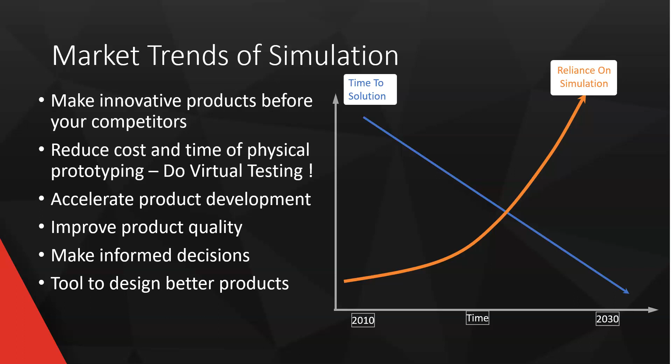So quickly, I want to talk about where SolidWorks simulation and plastics fits in. We have a lot of simulation tools here in the SolidWorks package. Let me just get my pointer out so I can show you what I'm talking about.

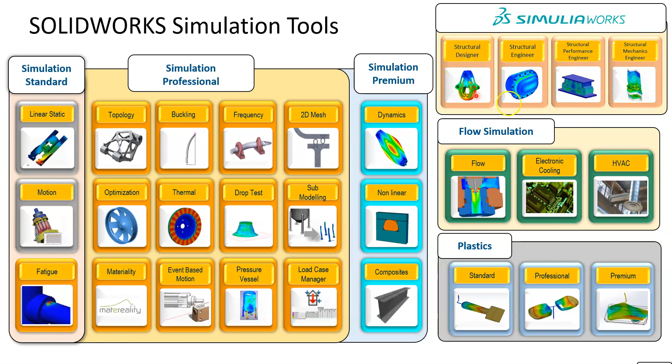Also, here's Simulia — we're going to talk a bit about this, but the plastics version. I've talked about Simulia in a previous webinar, so if you want to just check that out. So that was simulation — we've talked about simulation, what it can do for you.

But now I want to talk about plastics. So let's talk a bit about plastics. So what is the difference between SolidWorks Plastics and 3DEXPERIENCE Plastics?

Like I mentioned before, there aren't that many differences. They can actually fill the same roles. For your business, they can give you the same things, but they have slight differences. For example, 3DEXPERIENCE is more scalable. You can buy a license for a short amount of time for just one project and then use that again. SolidWorks has a couple more specific features, but 3DEXPERIENCE has its own fair share of them. So mostly when I'm showing pictures and talking about stuff in this webinar, really they are very similar. It just depends on your pricing model, your interest, and your pre-existing knowledge, which we talked about in the last slide there.

Another thing is the meshing capabilities within 3DEXPERIENCE are industry leading. They are insane. They mesh your parts very quickly and automatically. You can change your mesh if you choose to, but most of the time it does it for you. You don't even think about it.

Then you have local and cloud solvers. SolidWorks is a local solver. You can't solve your stuff on the cloud, but you can solve it on an external simulation computer or server if you needed to. But you can also do that with 3DEXPERIENCE, and with 3DEXPERIENCE you can solve on the cloud. So you can literally just make your simulation, set it up, offload it to the cloud, and then come back to it when you're done. It's amazing, and you can keep working - you spare all your hardware for that time that you're actually simulating.

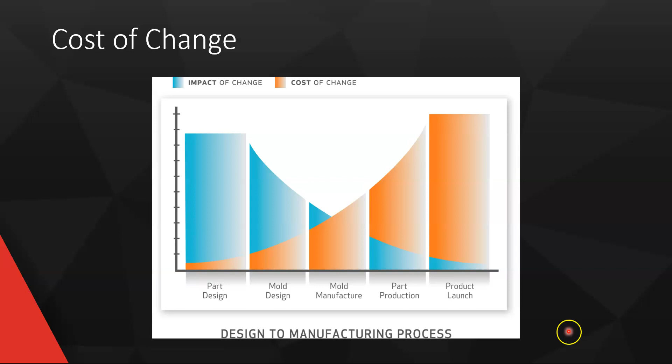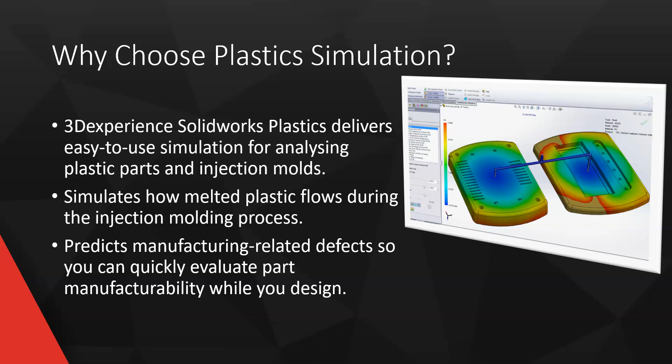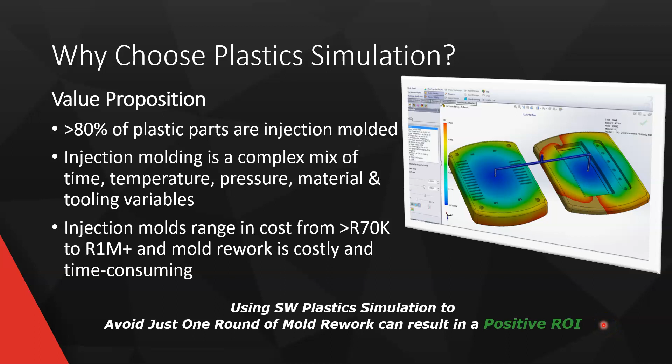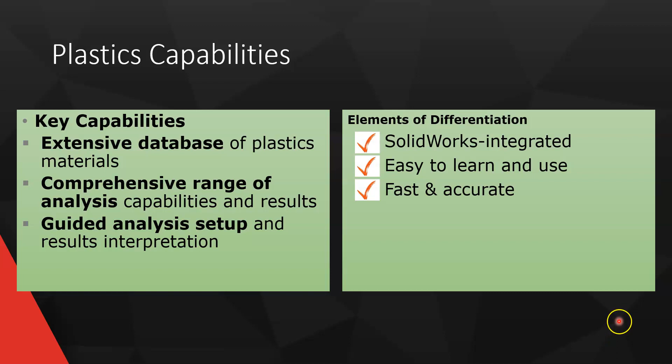So the elements differentiating SolidWorks and 3DEXPERIENCE and the rest - keep in mind, they both integrate very nicely with SolidWorks. If you have SolidWorks already, you can just draw, the parts actually integrate very well, it's within the SolidWorks environment. And this is both 3DEXPERIENCE and SolidWorks - it's easy to learn and easy to use, and it's very fast and accurate.

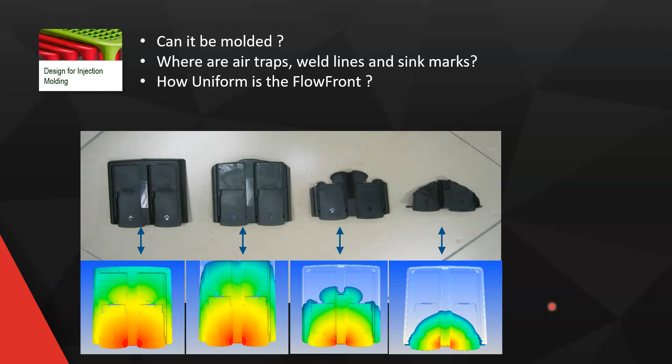So if you see this picture, you can see this is a short shot - the thing hasn't actually generated fully. This is simulated first, and then it matches with the real world counterpart. So you get these four different investigations into the flow front of the plastic. You can tell the tool where I want to inject, and then you can see how long it takes, you can see the pressures, you can see everything as it goes.

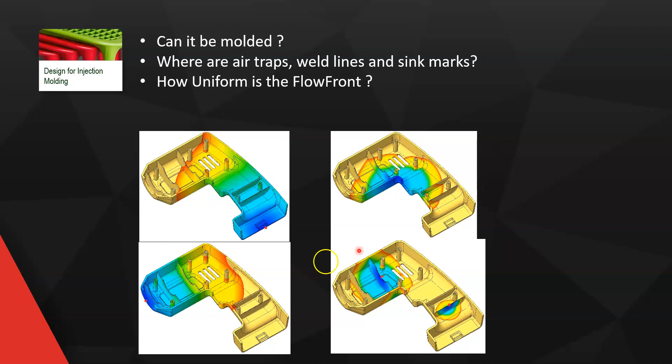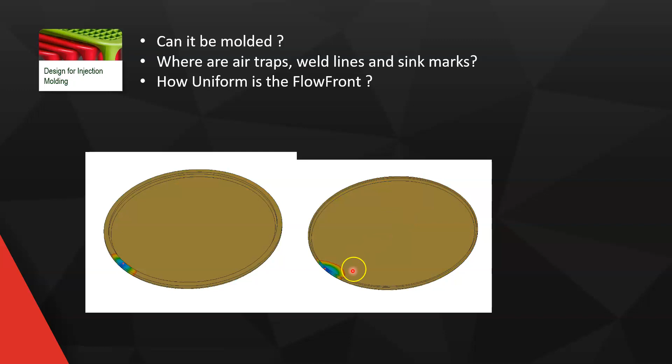You can see multiple injection locations, like down here. And you can see if I look at these two versus this one, this is a much more uniform flow front compared to these - so realistically, you can have less problems with this top right one than with these others. You can also see the flow front, caused by pressure and viscosity, and how the flow front changes as it goes. Obviously, this is more desirable than this because this will create an air trap, and we'll see now.

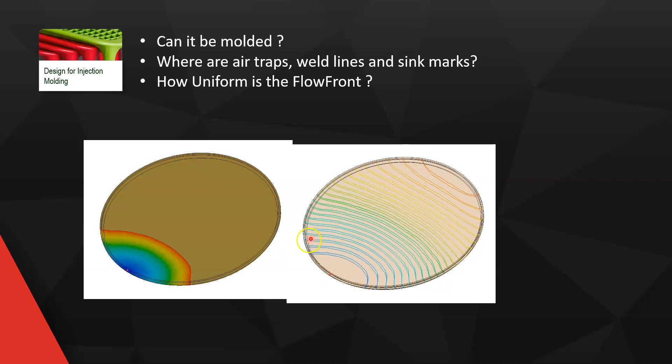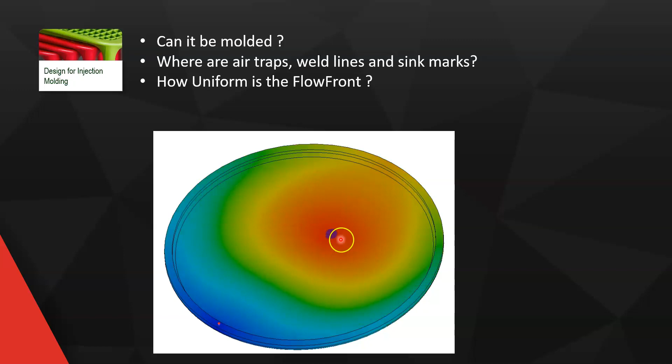But here you can also have these cool little plots that show you exactly the time as the plastic flows - you can see exactly these little contours. And then here, look, this is that one I showed you earlier - you can see the plastic goes around and forms a little thing over here. This is an air trap. So the air would get trapped in here and it would cause big problems unless you have to create an air trap there, so you can tell the software where to make air traps.

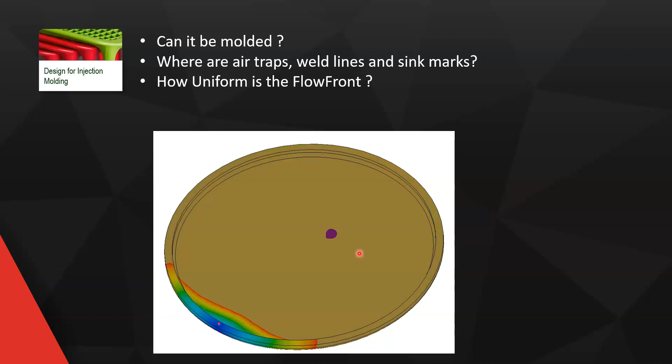So here you can see a bunch of air traps. This tells you that you need to have air vents or else it won't work for you. So even little things like that matter. We've talked about big stuff like reworking a mold, but in reality, just being able to design your product quickly, knowing where the air trap's going to be, saves you money and time straight away.

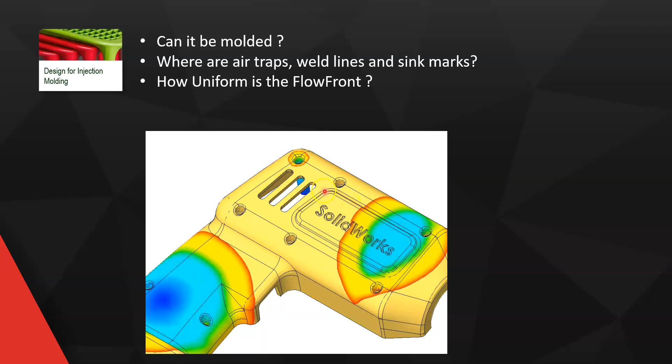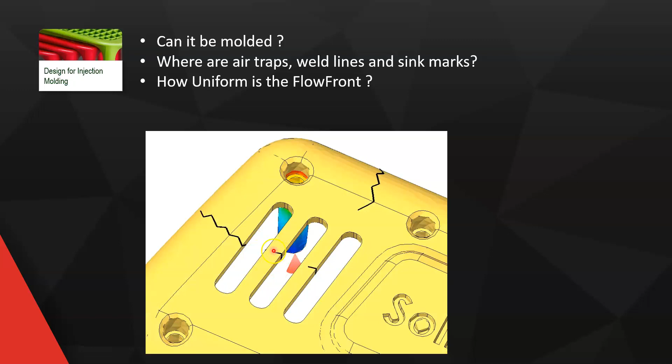Also, it can predict weld lines. So where the plastic meets, you get these little weld lines where the front of one flow of plastic meets another front of plastic, and that can be a high stress concentration area. So you want to make sure this isn't happening on a point that's going to take stress. It's very nice that you can do that.

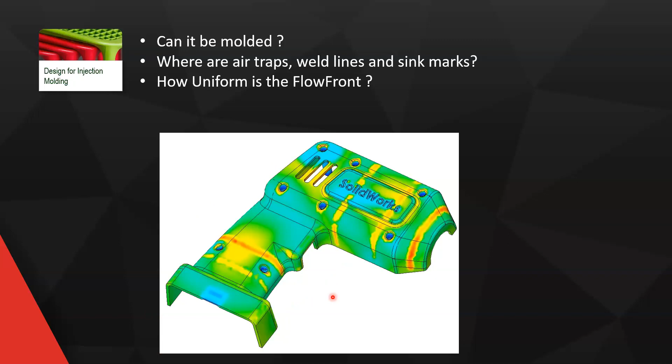And then sink marks. This is just from the cooling of the plastic and the filling of the plastic. You get these marks, and it can actually predict that too.

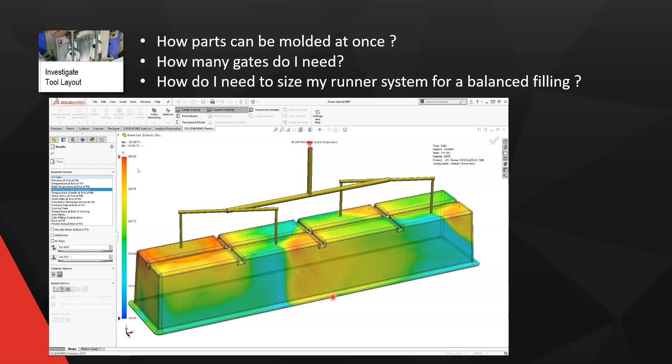So more questions: How many parts can be molded at once? How many gates do I need? And how do I need to size my runner system for balanced filling? For the first one, how many parts can be molded at once, that's up to you, that's the strength of your computer. Honestly, you can mold as many as you want. You can see we're molding a whole bunch of different gate locations as well, and you can see how many gates you need. That's the answer this can give you.

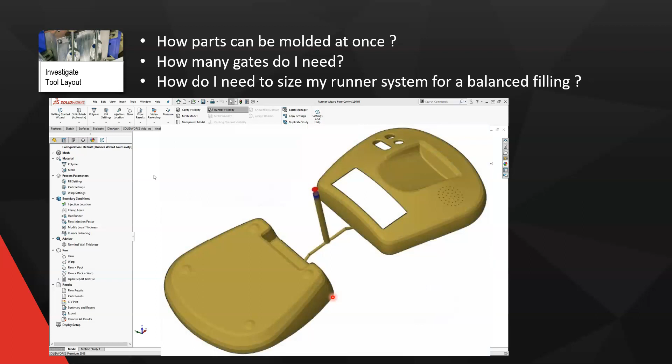So if you look at this picture, you can see the left side fills quicker than the right, and you get this uneven fill. So what SolidWorks can do is automatically resize your runner system to fill the whole volume at the same time. It fills it, and then shows you it fills exactly the same time. It tells you how big your runner system must be on each side to get that.

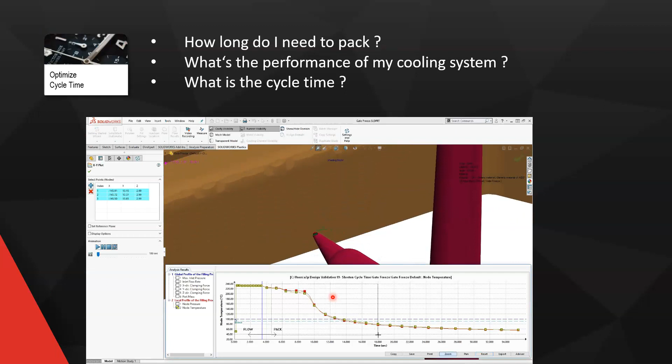It's really powerful. So more questions: How long do I need to pack? What's the performance of my cooling system? What is the cycle time? All of these questions can be answered with 3DEXPERIENCE or with SolidWorks. In this case, this is the SolidWorks user interface.

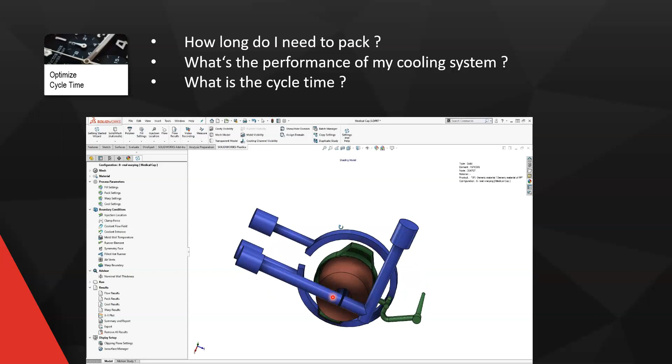Very, very nice. You can see how easy it is to distinguish different colors. You see these little blue things, these are actually coolant lines, not in this one, the previous one. And you can essentially simulate the cooling of the system, so you can see if your part will actually cool properly.

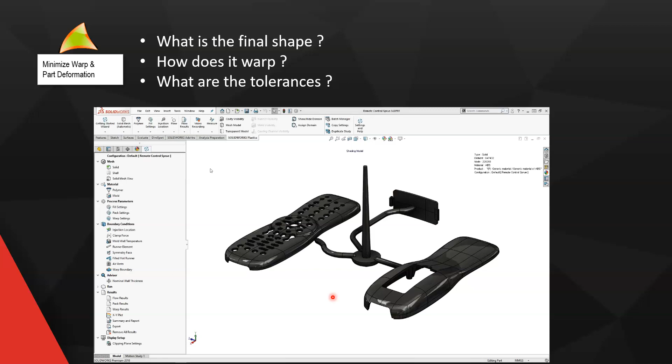Then these are cooling lines, and we are going to see how the part warps as it cools after it's been ejected. That's the crazy thing. So you get, what is the final shape? How does the shape warp? What are the tolerances? All of these answers can be given to you by SolidWorks or 3DEXPERIENCE.

It's really, really cool. So a little bit more about SolidWorks, this is within SolidWorks Premium. You get different types of meshing: the tetrahedral mesh on the left, and you can even do hybrid meshing, where you have tetrahedral mesh on the interior and more square triangular prism meshes on the outside. It's really cool stuff, two different mesh types for different situations. And if you have the expertise, you can do kind of whatever you want.

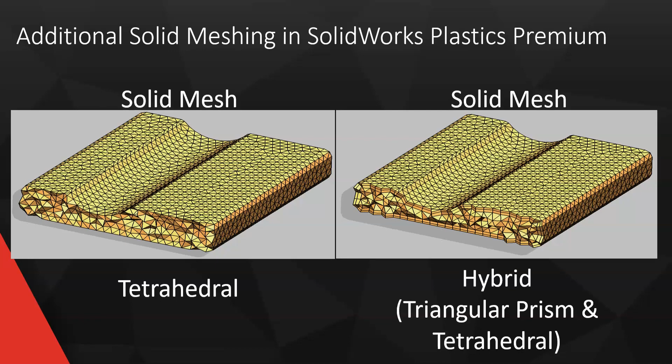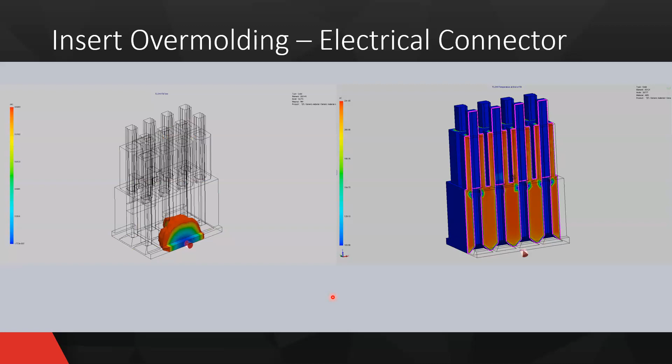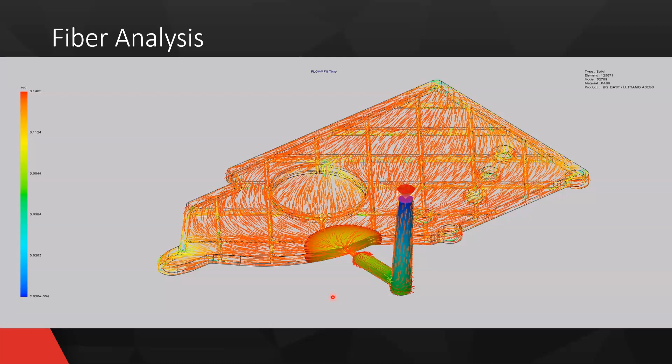Fiber analysis, this is also within SolidWorks. It can tell you how, as the plastic flows through the part, the fibers are going to look within it. So if you have a stress concentration issue, you can very easily alleviate that by knowing the way the fibers go. So as a designer, it just gives you tools to do anything. You can choose whatever you want, and you can fix and solve whatever problems you choose.

Then we have birefringence. This is really crazy.

SolidWorks can actually tell you the refractive qualities of plastic that you have injected. Due to different temperatures and pressures, a piece of plastic will have different refraction qualities. You get these little rainbow things, like if you look through glass a certain way, or different plastics.

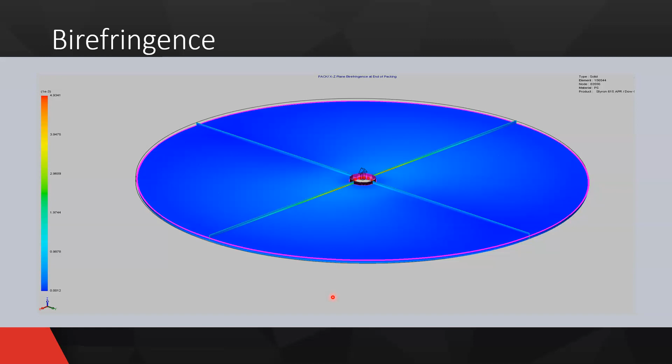This thing can tell you how it's going to react. It will tell you exactly how it's going to look from different perspectives, and you can fix that. So if you're 3D printing something, or injecting like a lens, you can literally just solve that problem with this capability.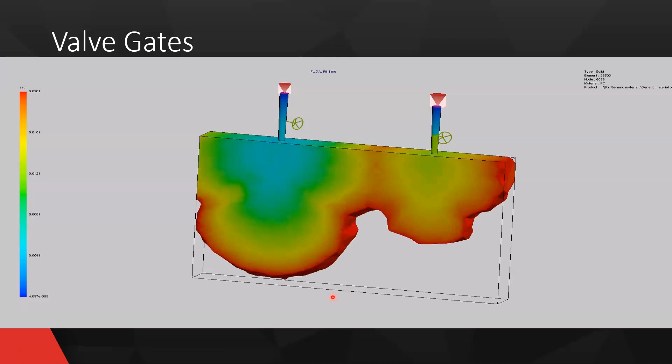Then you get gas-assisted injection. Often you need to hollow out the interior of a plastic part, so you inject a gas through the center, and you can actually simulate that. You can also simulate separate valve gates, timing them to inject at certain times, so you can experiment with what's most optimal for fill time, pressures, and ease of fill. That was a bit about SolidWorks Plastics.

A lot of the capabilities are in 3DEXPERIENCE, but maybe not all the high-level ones. I'm not sure exactly, because there are a million qualities, but many are similar. So let's talk about 3DEXPERIENCE Plastics for a second. This is the plastic injection engineer role.

With the role comes a whole bunch of different features. You have bookmarking, which is file management. You have collaborative lifecycle, which is a PLM system. You have credits and tokens for cloud solving. You have Simulation Finder, which can help you find a simulation within your system. You can define new materials, find products, monitor your cloud jobs—like a million different things.

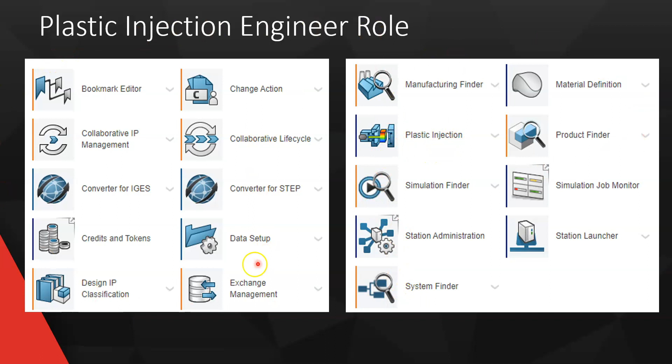Change action is another part of the PLM system. You can even convert for step files and IGES files. And then here's this plastic injection right here—this is the thing, this is what we use, this is the actual role. So this is the role, and each of these are apps within it. It's a little bit of a different system, but let's talk about it.

You can virtually test the performance of plastic parts and mold tooling designs with an intuitive guided simulation assistant that minimizes the learning curve. You can cover the needs for all industries, all key workflows, and all user personas with a single role, as well as predict common molding defects, including weld lines, sink marks, air traps, and incomplete filling.

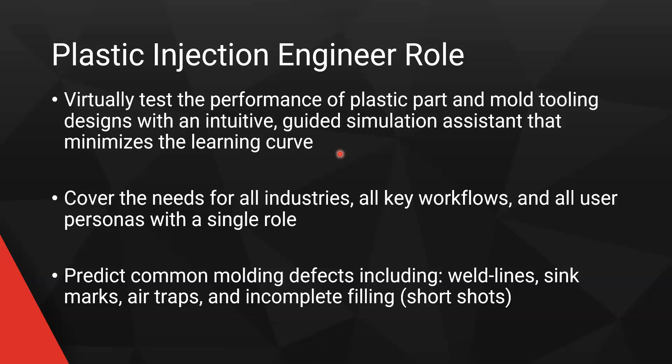So you can do all this stuff in SolidWorks, but 3DEXPERIENCE does it too. You can evaluate the effectiveness of these, which we've kind of talked about already, but you can also apply advanced structural capabilities available in the 3DEXPERIENCE platform, such as nonlinear, multi-scale material modeling directly on a common model. It's really powerful, because you can have a SolidWorks part or a 3DEXPERIENCE part, and actually run it on this plastics role.

You can also leverage process automation, design of experiments, and advanced optimization tools available in the 3DEXPERIENCE platform. This is really important, because 3DEXPERIENCE is like its whole own world, and it connects all these different industries. So if you have a plastics role, it's super integrated with all these other roles within 3DEXPERIENCE. You can kind of do whatever you choose to—combine it with all the PLM systems, task management, and all the other design tools. Really cool stuff.

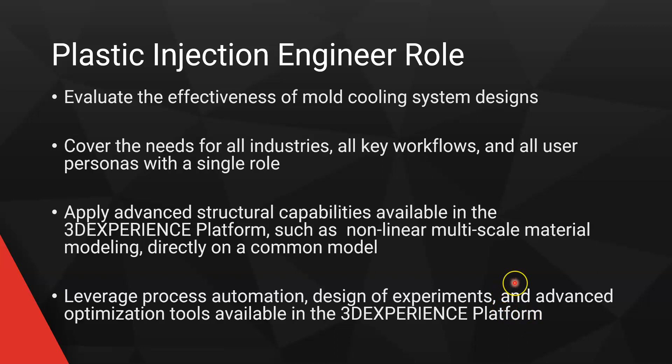So let's look at a little video about plastic injection.

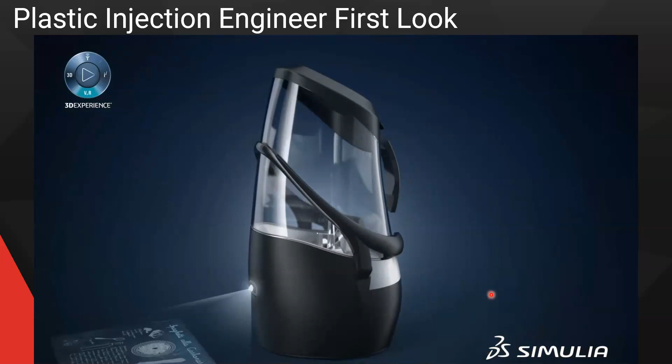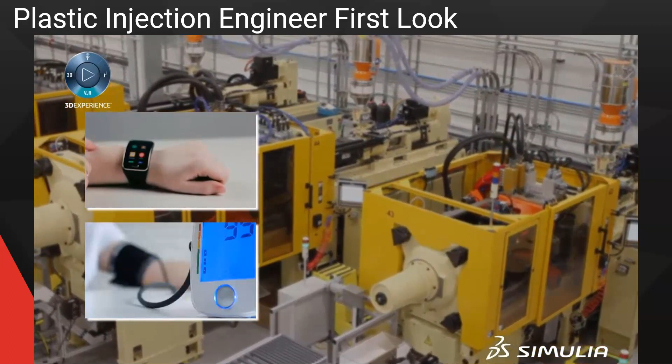From personal electronics to home appliances, office furniture, and even medical devices, plastic products are everywhere. Optimizing the design and manufacture of these products can have a huge impact on their overall performance, quality, weight, cost, and time to market. The plastic injection engineer role on the 3DEXPERIENCE platform is an essential tool to validate and optimize injection molded plastic part and mold designs. Starting from SolidWorks, you can connect to the 3DEXPERIENCE platform using an integrated workflow that enables you to easily save, manage, and share your design in a secure, cloud-based environment.

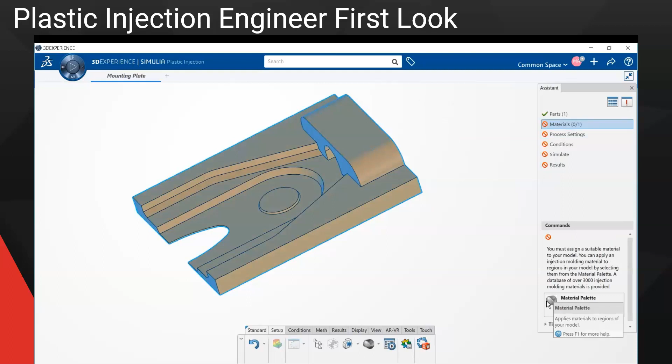With the plastic injection engineer role, you can use a guided workflow to quickly set up and simulate the filling injection molding process. Product designers can assess the manufacturability and quality aspects, such as weld lines and air traps.

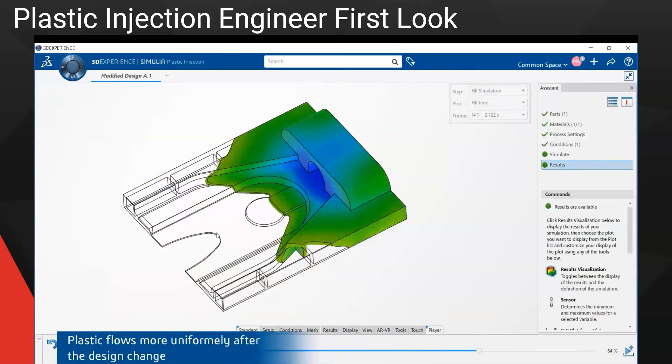When issues are identified, you can make a design change in SolidWorks and quickly return to the 3DEXPERIENCE platform to rerun the simulation and evaluate the results.

Furthermore, mold designers can evaluate and optimize the feed system and cooling circuit designs. You can also simulate advanced molding processes like two-shot overmolding.

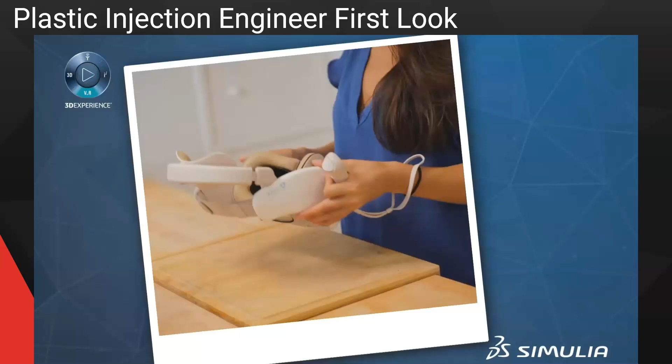With Simulia's Plastic Injection Engineer role, you can take control of your plastic part and mold designs to eliminate mold rework, improve part quality, and decrease time to market.

Cool, yeah, so really interesting. It shows you how you can integrate SolidWorks and 3DEXPERIENCE. And yeah, it's very, very, very cool stuff.

So that was 3DEXPERIENCE Plastics. Let's move on to the plastics demo. I've done a demo and I want to show it to you guys. It was all within 3DEXPERIENCE, and yeah, it's really, really cool.

So basically, this is 3DEXPERIENCE. This is how it looks, this is the user interface, and this is exactly what you can do. So that's Mecad Sales, that's what I'm using, but that's a different platform - each one can be its own. I've created this whole dashboard.

All of this was done by us or by MeCAD, and this is something you can edit yourself. It's almost like a website that you can change on the fly all the time, and everyone can see the same thing. So these are all the apps that I have with my role, and yeah, they're very, very, very powerful and useful.

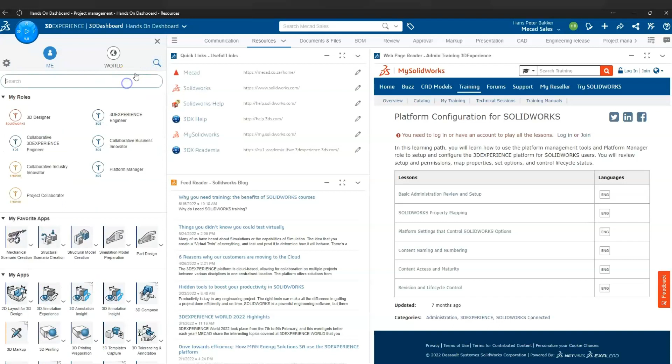So let's look at them a little bit more. This is design with SolidWorks, which is what we're going to use. This literally lets you integrate SolidWorks with 3DEXPERIENCE, so any part or any capability within 3DEXPERIENCE can be integrated.

So that's the plastic injection app, which we talked about already. Let's look a bit more at it. So we close that, and now we can close this window and look at everything.

So what I do is I can go to the search bar and just search. Also remember, this is all in a website - you can access this from anywhere as long as you have the credentials.

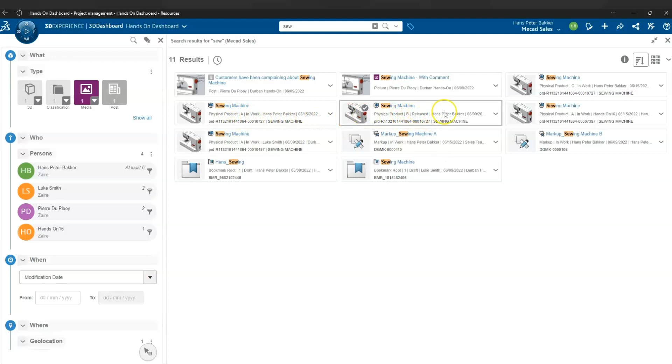So I search 'sew', and you can see there's different sewing machines. There's the A revision, a B revision, and a C revision. I've made different revisions to make changes in the part as I've been playing with it and experimenting.

So I go 'open with', and you have all these different things you can open it with, which all have different powers and capabilities. Let's go to design with SolidWorks - press it.

It's quite a big part, so it might take a second. But basically what it does is it takes a part in 3DEXPERIENCE and it literally opens it into SolidWorks - it just pops it up in SolidWorks.

Okay, so we're opening a very big part because it's got a whole bunch of moving parts and mates, which I'll show you. So this takes a while, but it would anyways, depending on who you are and what your kind of computer is.

So if we look on the right-hand side, this is the window that is the 3DEXPERIENCE add-in into SolidWorks. It's really, really cool - it essentially lets you get the power of 3DEXPERIENCE directly from your SolidWorks. You can do product lifecycle management.

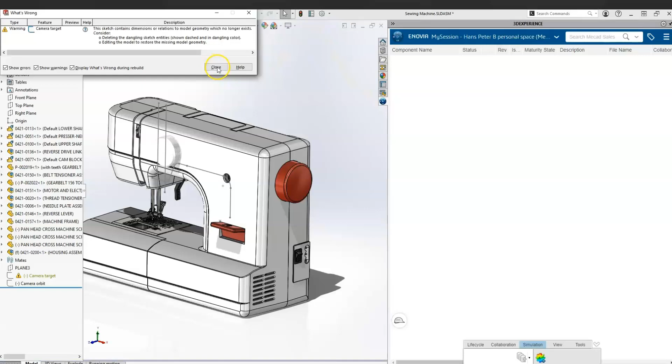This is a little error about camera targeting, just from messing with the part. And you can see there's a lot of information here on the right. Don't get overwhelmed, don't worry - it is actually quite straightforward once you get a hang of it.

So this is the part we opened, and you can see if I take that little wheel and spin it, the actual little thing moves up and down. So the whole thing is literally a working sewing machine with all the parts mated correctly, which is crazy. Just by the way that we can do this, it makes me very happy to actually be a part of it.

So what I want to do is show you how you can integrate SolidWorks and 3DEXPERIENCE. If you press a part in the SolidWorks environment, it highlights a feature in this feature tree on the right. Vice versa, if I press one there, you can see a little highlight box there. So it's almost like you have your own feature tree - you almost don't even need the one on the left. You can use this feature tree for pretty much everything you need.

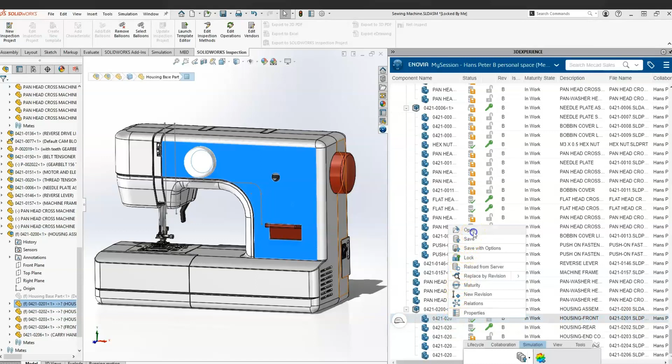As well, this thing is integrated with the cloud as it goes, as well as a PLM system. It's crazy. So if I press this face, which is what I want to use, I right click it and say open - this is all real time, by the way.

Boop, straight away it opens into SolidWorks for me. So now I have this part in SolidWorks, and I'm going to do a simulation on it. My plan is I want to see if I can fill this part and see how it works. I could do it in SolidWorks Plastics, but I'm going to do it in 3DEXPERIENCE. And it's this easy.

So this is the window we have, and it shows all this information - revision, maturity state, description, file name, the collaborative space it's saved in, all cool. So I have to lock it, which is essentially like in PDM where you check out a part. Now I can edit it and change it and do whatever I want. It's my part as long as I have locked it.

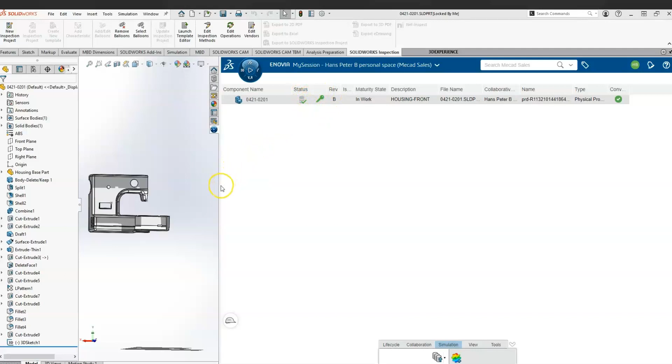So I've done that. You can see you can drag this window - it's completely editable, it's up to you. So I'll make it smaller so I have some more space. And I can literally go to 3DEXPERIENCE straight from here.

So I search plastic injection and I press it. What this does is it launches plastic injection and takes my part and puts it into the plastic injection environment as a simulation part. I can just run a simulation on it straight away. It really is that simple.

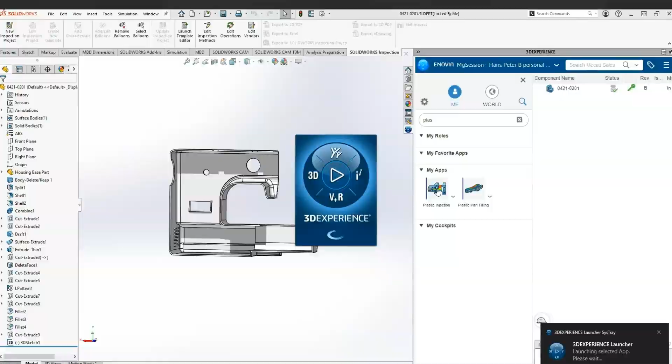So it obviously opens up a launcher, and then I open another screen to just drag it across, and yeah, so that's what we get. So we have the part now in the 3DEXPERIENCE environment. On the right, we have the assistant, which has parts, materials, all these things.

Don't think too much, it's not too complicated. It literally just helps you set out your simulation, because you go top to bottom - boom, boom, parts, materials, process settings - and it literally helps you. So you see if I press parts, it shows me, okay, that's what you need - you need a contributing part.

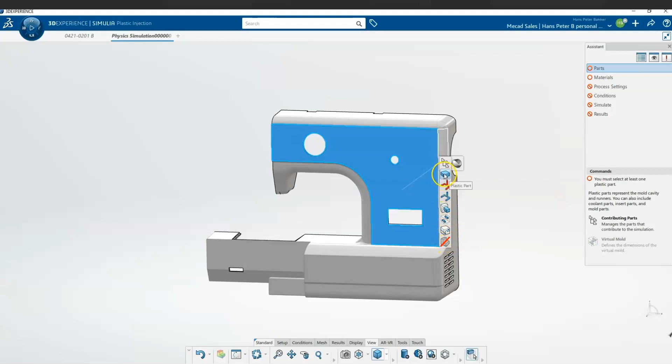So I have to decide which parts I want to contribute to the simulation. I say I want the whole thing. And then I need to tell it what that part is. So I go there and press this little icon, and I can decide what this part is to me. You can have multiple parts and bring them in, and you can even insert parts now. You could bring in a piping system, make it a cooling system or a hot runner system - that's up to you.

So now what it's done is it's decided this is now a plastic. You can literally go straight there, press materials, and then you can create materials. You could also have gone in the assistant and pressed materials. And I want you to look at that - 4,210 plastic materials inside this environment.

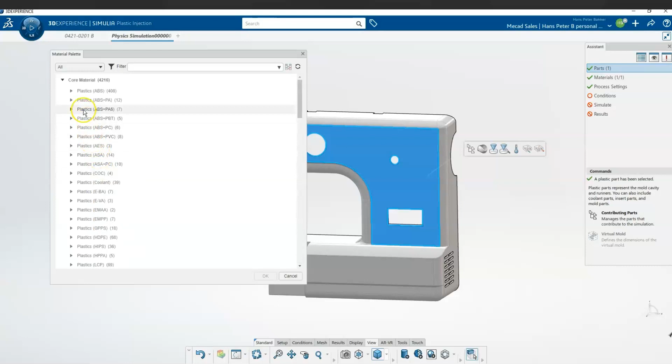This is just plastics, by the way - this isn't any other parts, no metals, just plastics. So over 4,000 plastics within this environment. That is a massive database. And you can see, if I go to ABS, there's 408 different ABSs. So it's very, very likely that the plastic you need is here, or at least a very similar one.

Also, this thing is a cloud-based platform, so it constantly adds more. You don't have to do anything - it just automatically brings them in, like you'll go in, run an update, and it will be there.

So if we go to process settings, this is all the settings for the simulation. You get shared settings, plastic flow simulations, pack simulation, mold, melt, heat transfer, mold thermal simulations, and summaries.

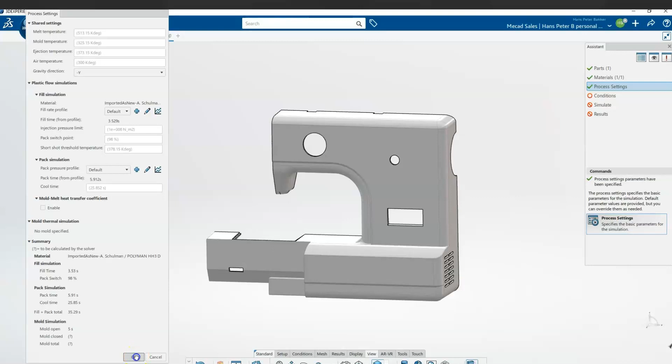So you basically get all these different parts of a simulation. Really, really cool. I made it a bit big for the screen, so I'm just going to drag it up and exit it there. You can see how many settings you have. You have total control of your simulation, you can do kind of whatever you choose, and this is all really how simple it is.

You go to conditions, you can press auto injection. Then you can choose a part, you can choose the diameter of the actual injection location, and you can see how many locations you want. And you can also exclude faces and stuff like that.

So let's say we want one face, one location. We say find locations, it calculates it, and it pops up over there. So it says that is the ideal location if you want to just do this size and you want to inject that way. So this is essentially how you set out where you actually want to.

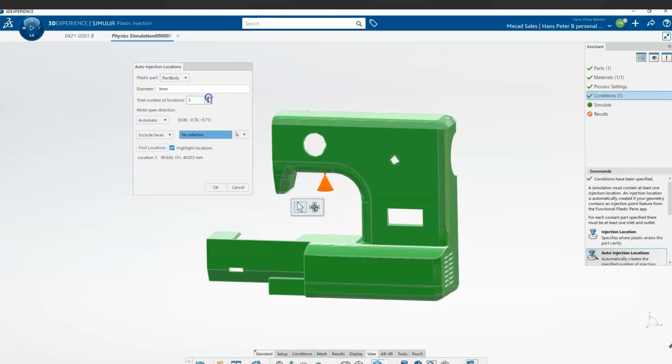But you could also, you see there on the right, injection location - so what I've done now is I've said 3, and now it selects 3 different points, and it shows me how they would actually fill. So the green one versus the yellow, that's kind of a guess of how it will fill.

So let's go back to 1, and then you press OK. And then, because I still have to go back and actually change it, because it is now 1, but now I have to go back and reselect just for the view. So it's going to ignore the ones that we used already. We say okay, we just select 1, we say find location.

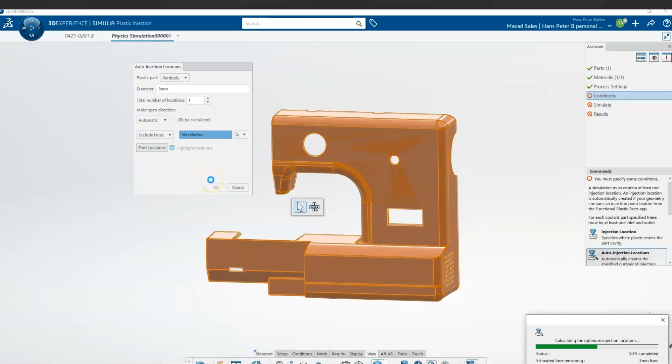So it just wasn't highlighted before. So now it's going to highlight them. We highlight the one location, say okay, there we go. Whole part is now, we have 1.

So if we go to simulate, we press simulate. Now there are different ways of solving - you get the cloud solver and you get a local solver. This is what really is so cool about 3DEXPERIENCE, is you get these different options.

You can simulate on your local PC. If it's overnight, you don't need it, it's fine. Maybe you understand it a bit more - this is also fill, pack and cool, warp simulations. You can do all these different things.

So we're just going to choose a local solve because I haven't set out the tokens yet, but that's okay, we don't have to. So I can choose how many cores I want to actually use as well. I could tell the computer, like, only use 4, it's fine, you don't need to use that many. I say okay, and then it's going to run.

And basically, this took about 5-6 minutes. I'm not sure how long, but I'm going to skip ahead because I don't think you need to sit here and watch the whole thing. But this is all still live - this is exactly what happened.

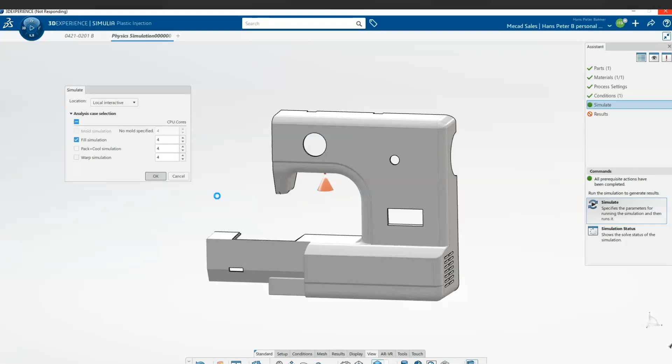So you can see it's busy loading, it's busy thinking, and then a little simulation window is going to pop up. This is also the automatic meshing that I was talking about, so this is the mesh it came up with. We can change this if we want, we can easily change it, but I chose not to - I'm just going to leave it like it is.

It's quite dense, as you can see, so that's probably why the simulation took so long. But it's dense as well, which is not necessarily a bad thing, because we have a lot of small little parts. This is actually a big part to plastic injection mold, and it's a big part to simulate.

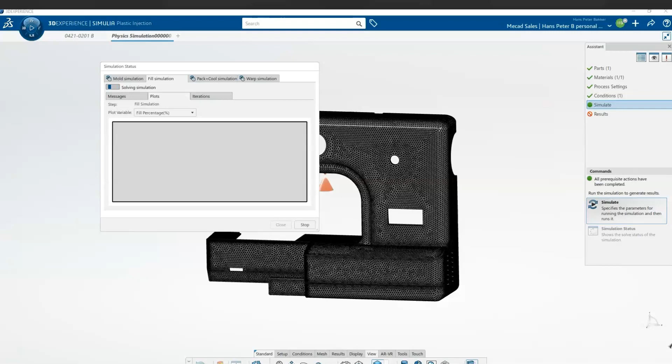So pretty cool stuff. If you look on the window over here, it's busy solving the simulation. It's still initializing it. Once we actually get there, so now it's said, okay, cool, everything is set. Let's start the maths - this is the flow rate into the injection location.

And then we can also go and we can look at different plots as it solves. It's quite intuitive - like you go to flow rate, it shows you the flow rate as the thing goes on. You go to maximum injection pressure, it shows you it's still increasing, which is what we'd expect. Minimum temperature, max temperature - these are just temperatures of the plastics within the product.

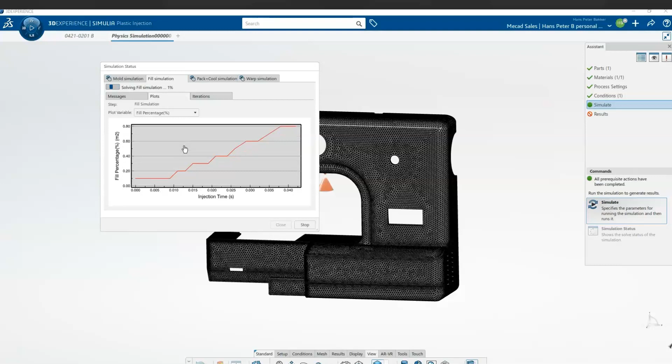Then you get the fill percentage. So this is probably where I'd leave it, because it shows you how far along it is. It's going, and then it's going to speed up in a second. There we go, it runs. I skipped the end, it's fine, we don't need to see the whole thing.

But let's look at this, this is the finished product. This little dialog box on the right shows you the step, essentially which simulation we're using, and then different plots. This automatically populates. You don't need to set these out beforehand, it just was like this.

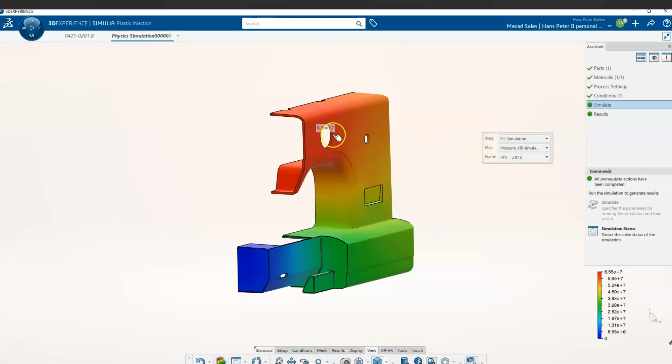I didn't do anything, you press the little play button and it plays an animation showing the pressure as the fill goes on. Then let's go to fill time and look at that. It fills, it shows exactly how the plastic would fill the whole model.

Then you can look at, there's a million different little plots here that you can use. And these are just automatic, you don't need to even do anything, it does it for you.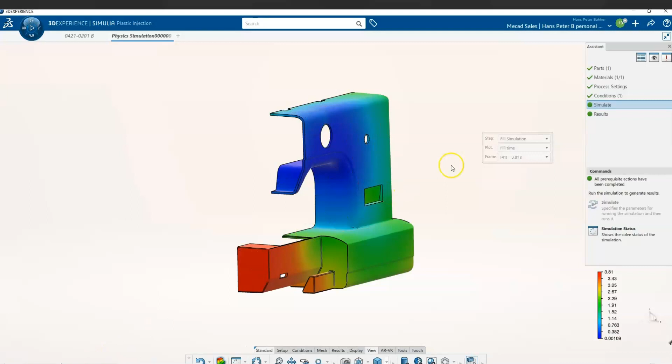So we go to, let's say, flow front velocity vector. We zoom in on this point, and it shows us the actual velocity of the plastic at these separate points. Obviously this big red one is the injection location, so it's going up really hectically. But as you can see how it actually flows through, it even gives you an idea of the fibers.

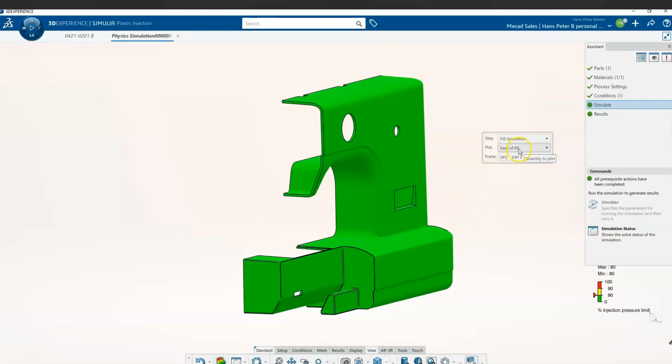Ease of fill - we assume the whole part's pretty green, so it'll be easy to fill, no worries.

Then we get bulk temperature at ejection. So it shows you the temperatures, or I think at fill, whatever, it doesn't really matter.

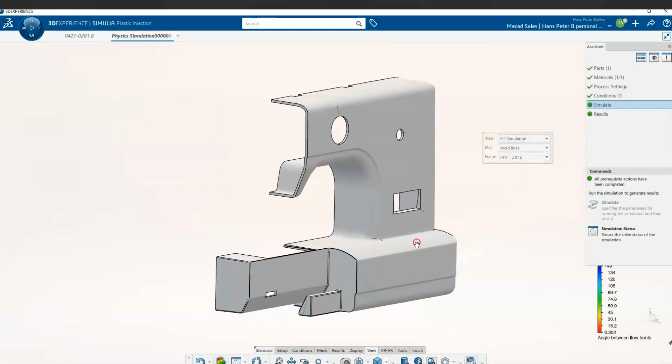Air traps shows you where the air traps will be if we use that injection location. These are all very, very accurate and verifiable results. You can see these little marks, it shows you where the weld line is going to be. So you would expect there to be weld lines on this little bracket, so you just have to hope around this little air intake location, but that's pretty normal, so it's probably fine.

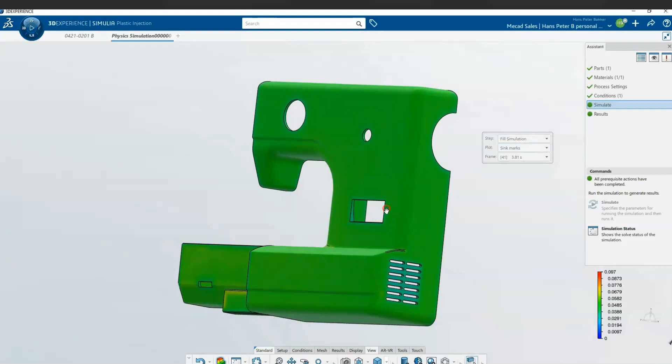Then we can go to sink marks. It shows us where the sink marks are going to be, where we're going to have little marks from the cooling of the actual part. You can see different cooling temperatures can cause that. You can also see the areas that are frozen at the end of the fill.

So yeah, I mean, you can look at all these different things. These are all just auto-populated. You can even populate more if you choose, it's completely up to you.

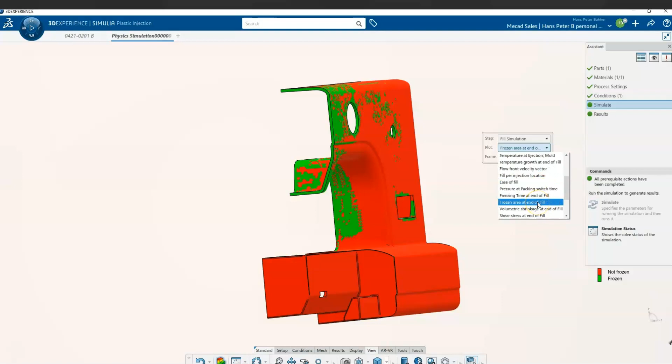What else? I think I've shown all of them. Let's see, there's freezing time at end of fill. You can see there's so many different features. Then you can even do ejection time.

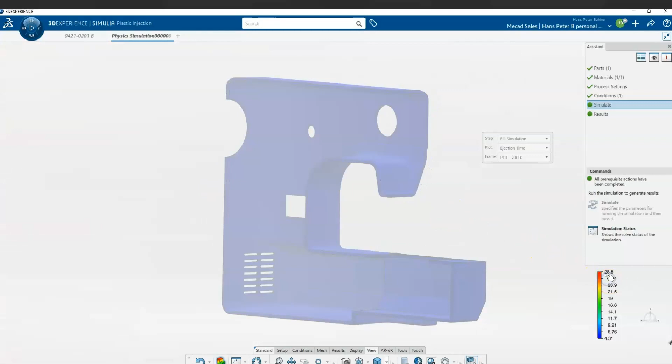So it shows you probably can eject it at 9 seconds. It's up to you, just depending on, there might be one little hotspot somewhere, but that's probably fine. Yeah, so you can show different transparencies.

So yeah, that was my little plastics demo. It was really fun, I enjoyed it. But let me just really go through the summary.

Using SolidWorks Plastics during the earliest stage of part and mold design helps you predict and avoid injection molding defects before you get to manufacturing. You can eliminate costly mold rework. You can improve the part quality, and you can decrease your time to market.

So that's essentially what we've been talking about a lot - you can improve your plastics outputting. You can output more parts, you can output better parts, and with more confidence in your results using these tools. And the thing to keep in mind is your return on investment is almost immediate, you will get your money back.